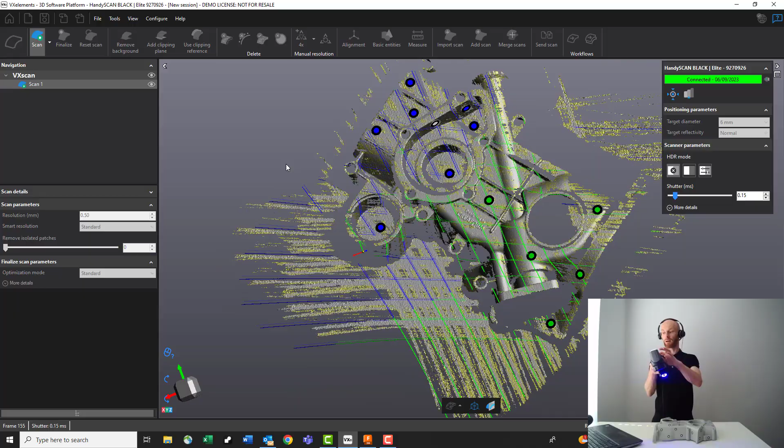So I'm going to hit Start Scan, pick up our scanner, hit our LED on the back, and we're going to start to pick up some scan data. Just going to zoom out a little bit to give us a better picture of what we're scanning here.

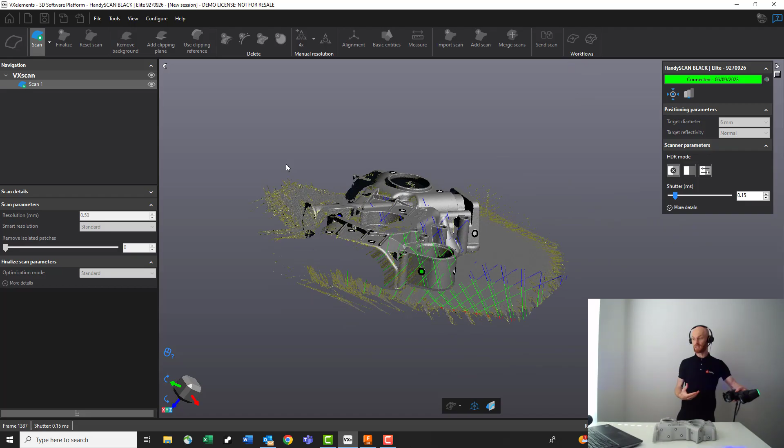As we work around the part, we refer to this as similar to digital spray painting. So we're moving around the part, making sure we can pick up as much data as we possibly can. Where the areas of hatching are green, that means we're a good distance away, and we're picking up data at 1.5 million points per second. Now, if we get too close, the hatching area is going to turn red, so is the LED on the back of the scanner - we know we're too close. As we get further away, we're going to turn blue, and we know we're too far away and need to get a little bit closer.

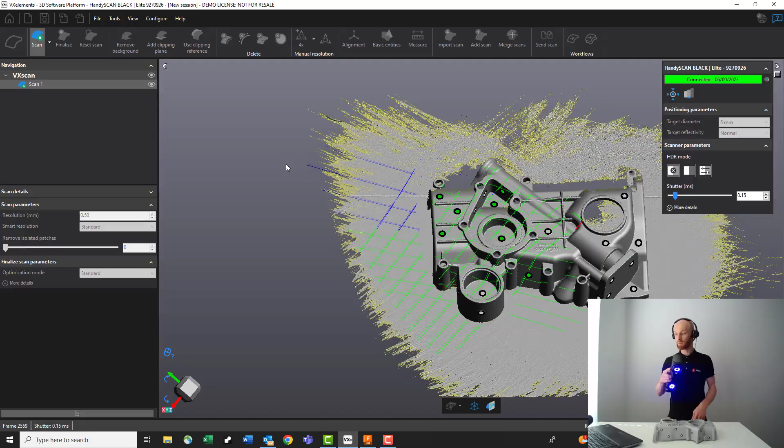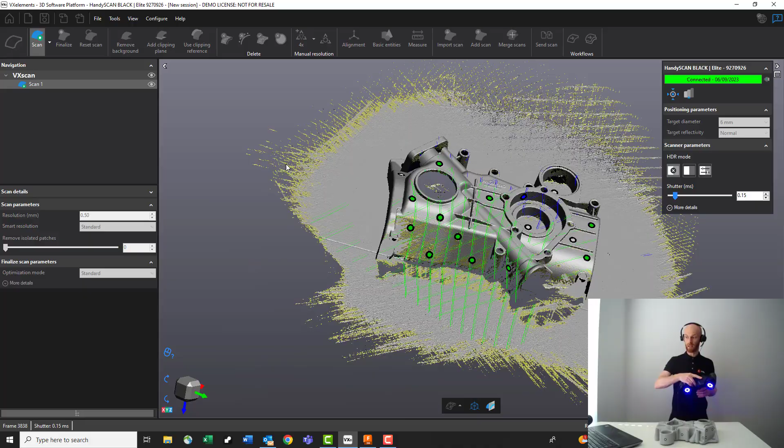So we're just going to work our way over the part, picking up as much data as we can. We can't overscan the part - the software is going to be constantly writing and rewriting, so we're not laying up lots and lots of scan data on top of each other. And the beauty of having targets on the part means that we can spin it around. If we can't get to the back side of the part, we can just spin the part around and continue seamlessly scanning the other side of the part.

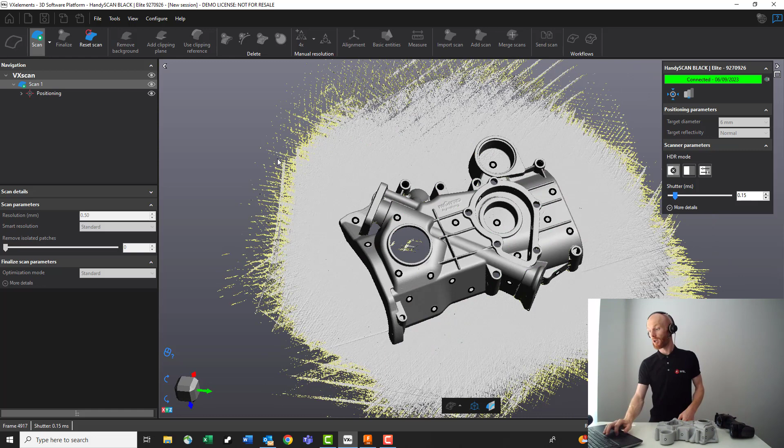Just going to work around this for a couple more seconds just to pick up a few more data points, and then we're going to pause this scan and flip it over to scan the inside of the part. So I think we've got enough data on this side. Let's hit pause, go back into the software, and stop the scan.

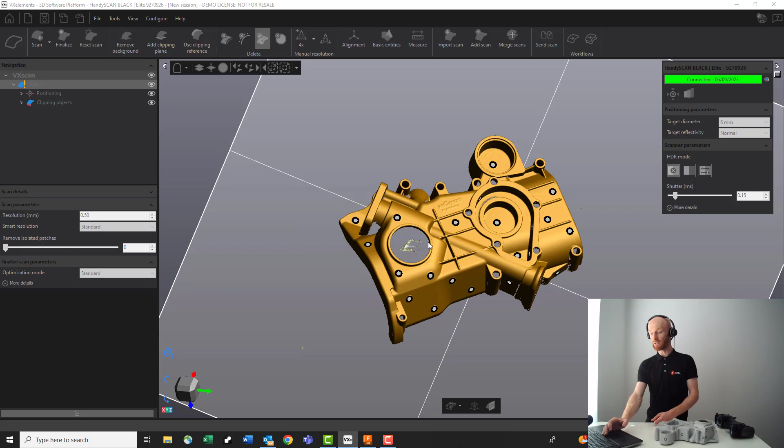The first thing we're going to need to do is get rid of this table that's underneath the part. So I'm just going to hit Remove Background - it's going to automatically detect this table. Let's hit Create to create a clipping plane to get rid of that table. I'm also going to select the main body that we've just scanned here and remove any isolated patches, so we're just going to delete anything that's not connected to that main body. It's just going to delete any little bits of noise and other bits that the table didn't clip out for us. Okay, so we've got the outside surface.

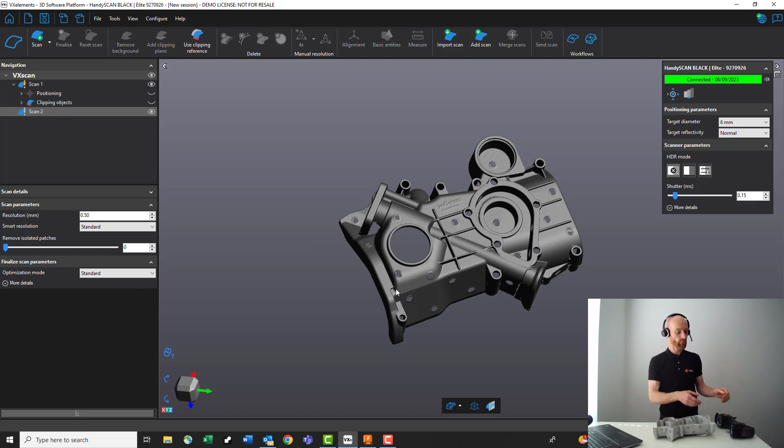Now I'm going to flip it over and start scanning the inside of the part. So let's add a scan. We can start this second scan. Again, pick up the scanner, hit the button on the back, and start to pick up the data on the inside of the part. Again, we want to keep the hatches green as much as possible to make sure that we're picking up all the data that we need.

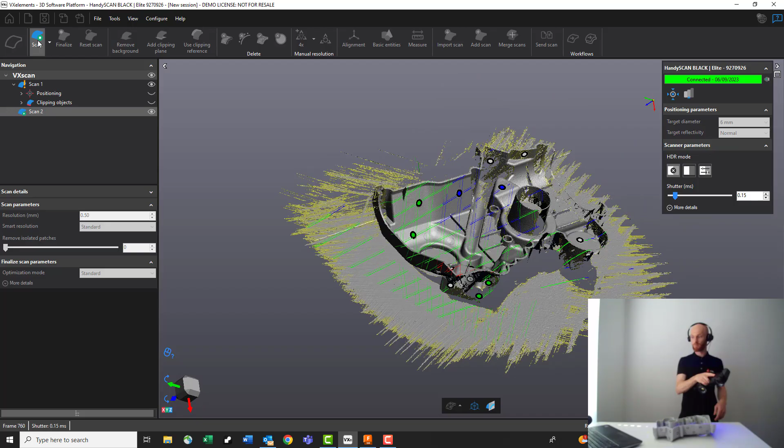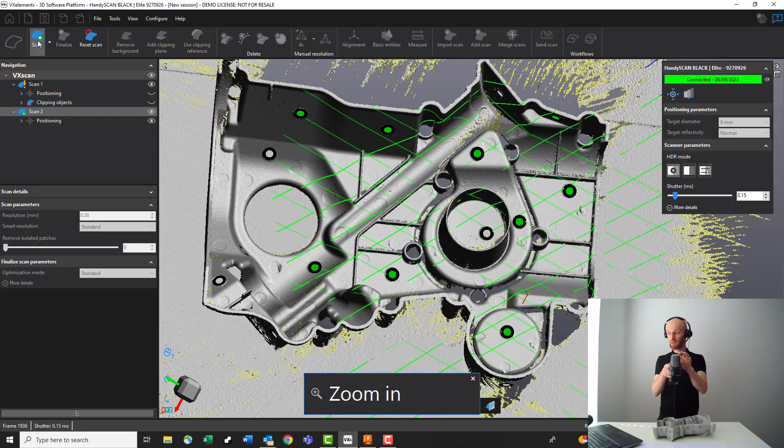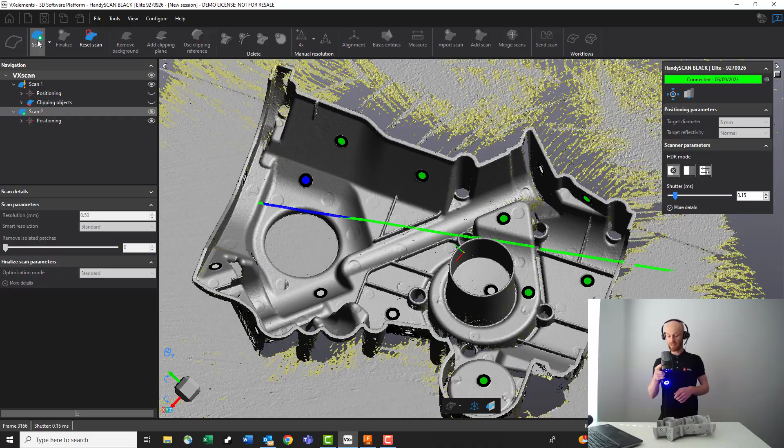We've got a couple of areas here with some slightly deeper pockets, which are a bit more difficult to get into with the hatching that we've got on the laser at the moment. But if we zoom into a particularly difficult area, we can use the single laser feature. So if we double click on the back, we're now just going to one single laser line. That's going to enable us to get into these deeper pockets much easier, and pick up a lot more data with this single laser line. So we can use this to go into deeper holes and deeper pockets, picking up data that we wouldn't otherwise be able to if we had our hatching turned on.

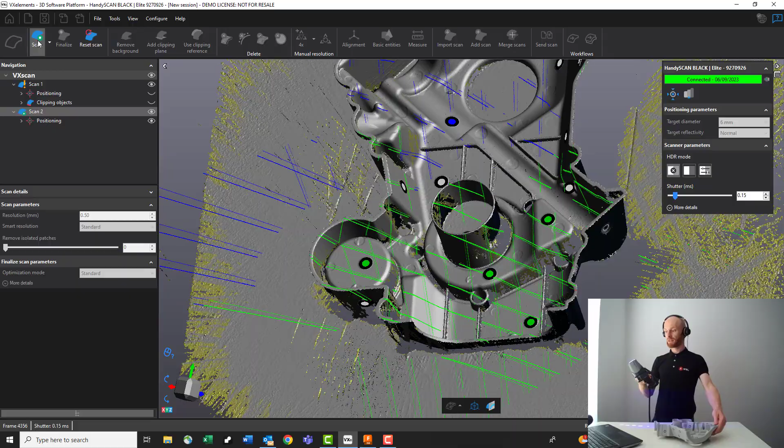Okay, so I'm going to go back to our hatch mode and carry on working around the inside of the part to pick up a little bit more data on the inside. Again, we've got target, so we can just spin the part around on the table. If there's an area that we're really struggling to get to, we can even pick the part up and carry on scanning it with it in our hands. Sometimes it's a bit easier to be able to work around the part while we've got hold of it.

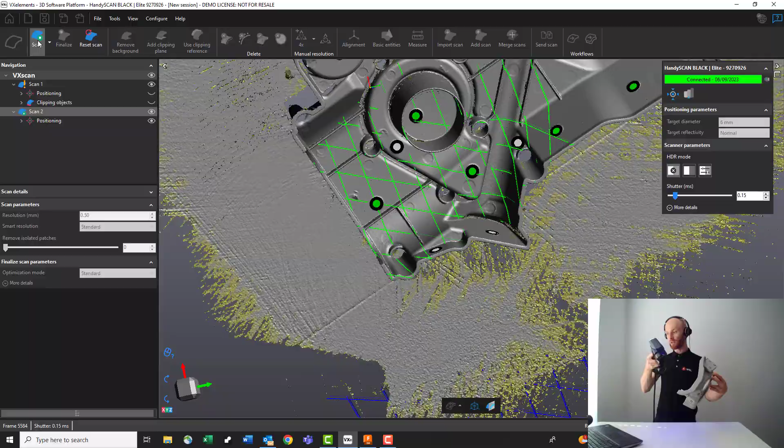Once we're happy that we've got enough scan data here, we can just set the part down, stop the scan, and start the process of removing the table and then merging these two scans together. At the moment we've got two separate scans, one of the outside, one of the inside. So we're going to have to firstly align these two scans together and then merge them.

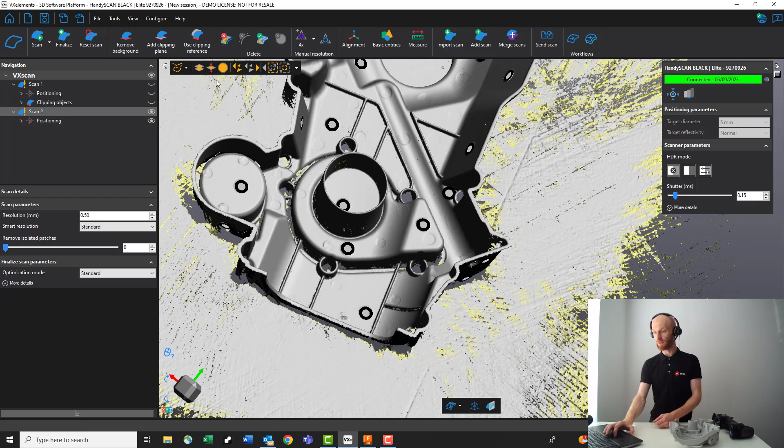So the first thing to do is remove the background of that scan that we just created. We can do that very quickly with the remove background command in VXelements. Let's get rid of these few little bits of noise that we've picked up as well. So we're going to delete anything apart from that main surface that I've just selected.

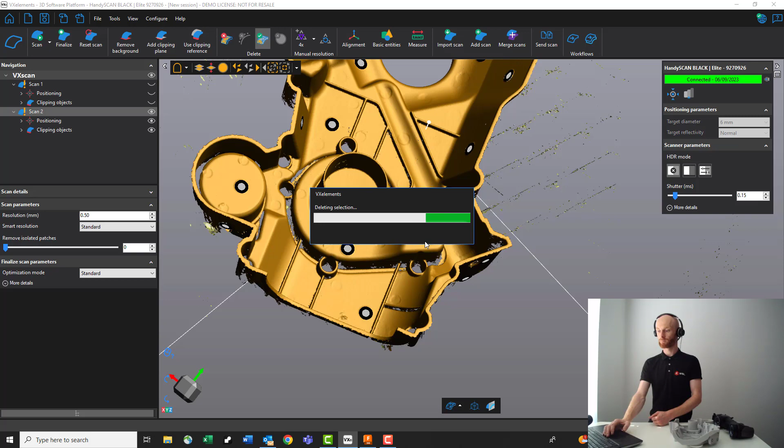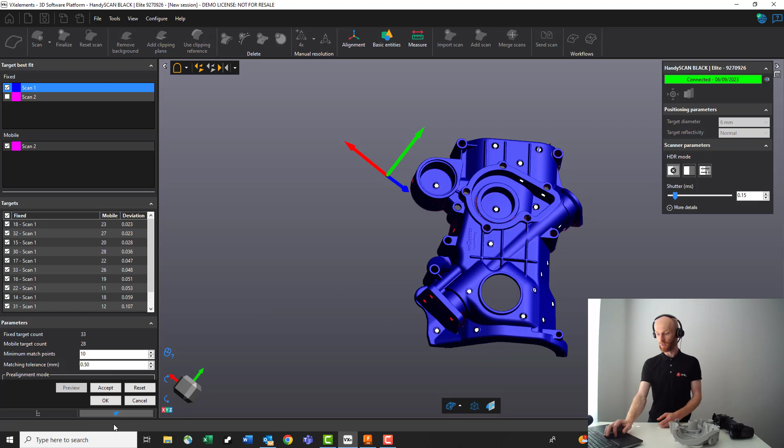So we're going to align these two parts together, and we're going to do that with a target best fit. We've got a couple of common targets that we scanned on both sides of the part. We're going to use those to align the two scans together. So we're going to fix scan 1, make scan 2 mobile, preview what that looks like. We've done a pretty good job there of aligning those two scans together.

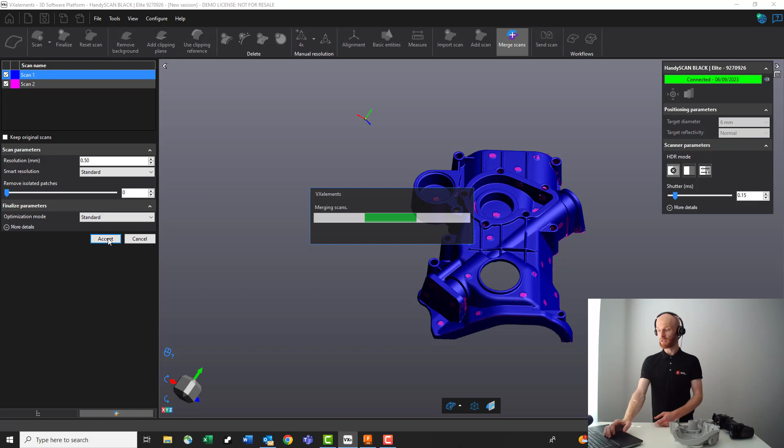So I'm going to hit OK, and now we've got a merge of those two scans. So we're going to merge these scans together. At the moment they're just two aligned separate scan datas. Let's merge the scans together and hit accept.

And now we're going to be able to export our final mesh. So we've got our resolution set. We set it to 0.5 millimeter to start with. We can now bump it up to 1 millimeter or reduce it to 0.25, 0.1. The raw data has all been captured, it's just the resolution that we output that data in. So I'm going to leave this at 0.5.

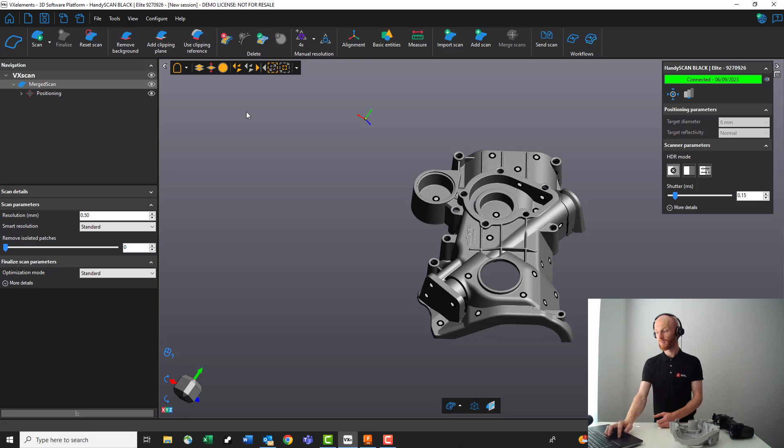And I'm going to send this scan into VX Model. This is where we're going to start to be able to build step features to go into our CAD software.

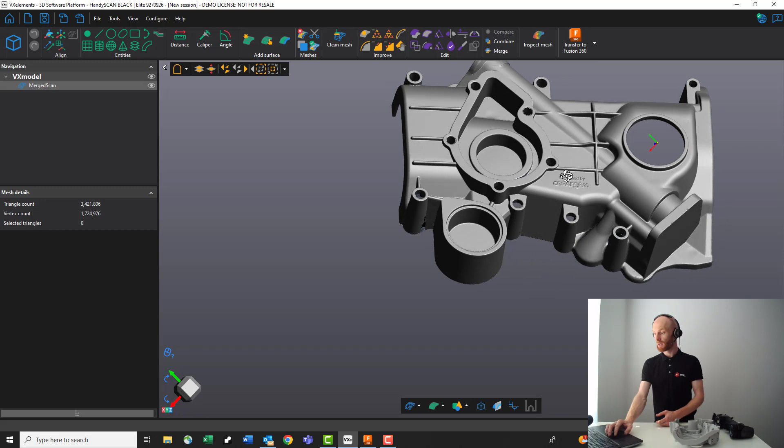So we can see the level of detail that we've picked up on the scan here. We can go in and see the detail that we've picked up on the logo. There are a few holes where we didn't quite capture all the way through, just because we did a very quick scan of the top surface. If we spin this around, you can see we've done a great job here using that single laser line to get into this hole depth, something that's really difficult with the hatch lines.

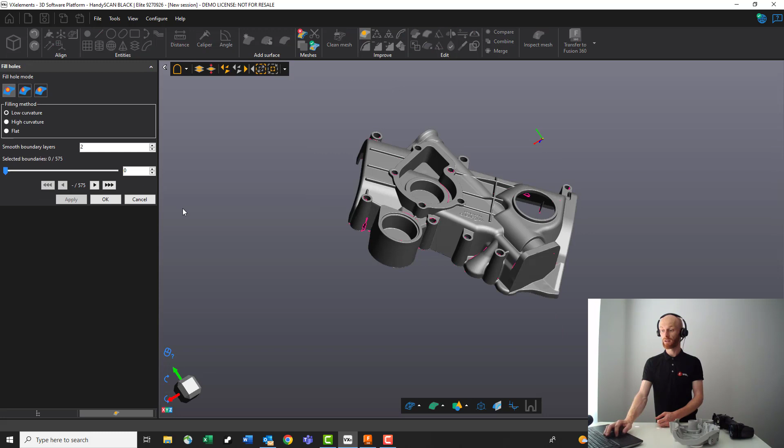Okay, so from here we can start fixing up the mesh. If we want to export a watertight mesh, we would just go fill holes to start with. We can automatically fill in all of the holes that have been left just where we didn't quite capture the full data when we were scanning.

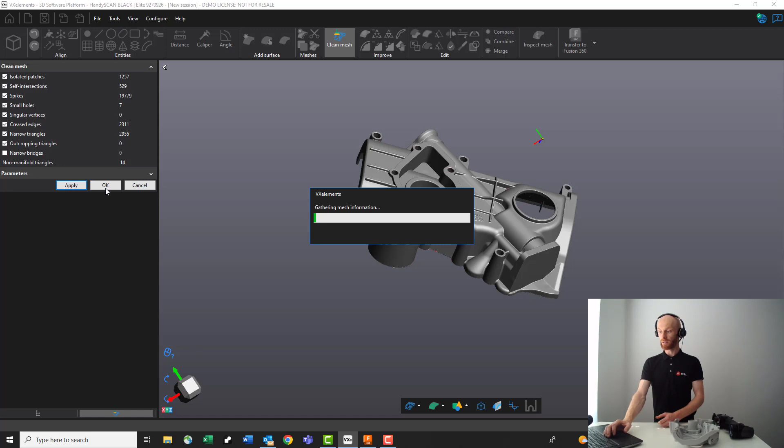We can go fill holes, clean mesh, and then we're going to create a watertight mesh that can either go out for 3D printing or into the next part of the process that we want to run through. If we hit apply here, we're just going to remove any isolated patches, spikes, narrow triangles to create a nice watertight mesh. So if we're happy with what we've created here, we're just going to hit OK.

Have a quick look around the part. You can see that it's now a fully watertight mesh, ready to export out to NTOP, to Fusion 360, whatever we want to do with the model next.